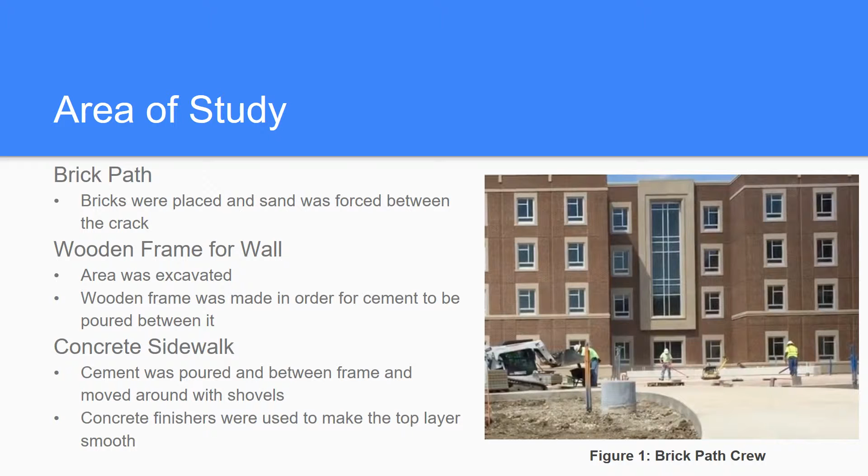This prevents the bricks from moving around in the future. The last activity we observed was the construction of a concrete sidewalk. Workers were moving around the cement with shovels to spread it out evenly, and also using a concrete finisher to make the top layer smooth.

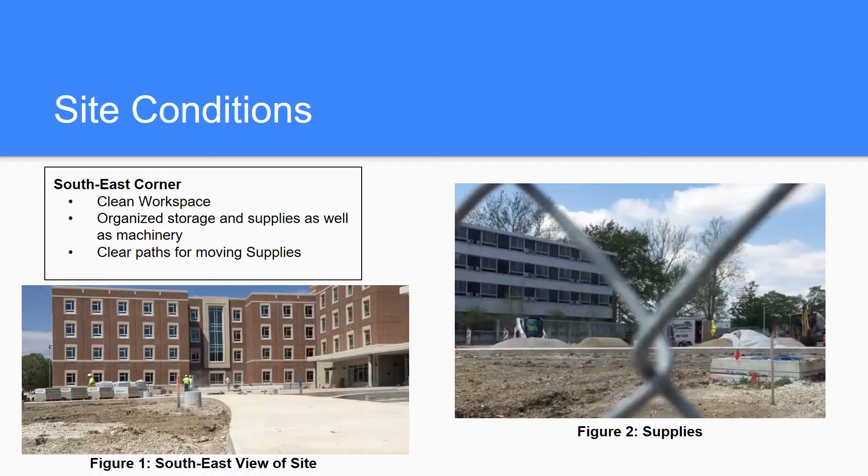The conditions for the residence hall construction site were overall tidy and well organized. In the southeast corner of the site, we saw a very clean, clear workspace, as seen in Figure 1, a screenshot from our video. The material and supplies were stockpiled in the corner in an organized fashion with a clear path to and from them, seen in Figure 2.

The site conditions in the northeast corner were also pretty organized and clean, as seen in Figure 1. The only thing we noticed were a few 2x4s out of place, which could cause a safety issue, and some garbage laying around. There is also a cleared path in and out for transfer of materials, machinery, and people. Last, the excavated area was safely braced, however it lacked clear markings to let other people identify it easily, which could be a safety concern. This is seen in Figure 2.

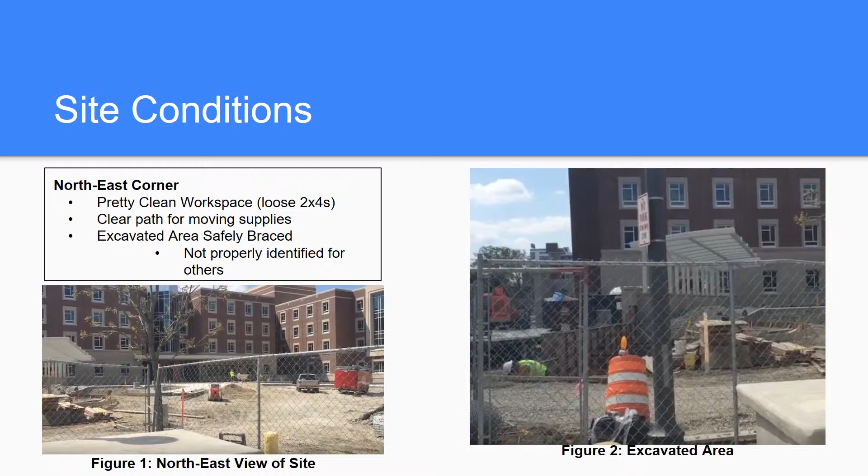Taking a look at the overall site, we can see how the original transportation and storage area was set up on the left, and how it currently is set up on the right. The reason for the change is that now there are concrete sidewalks and obstacles in the way of the old route, so a new route had to be made.

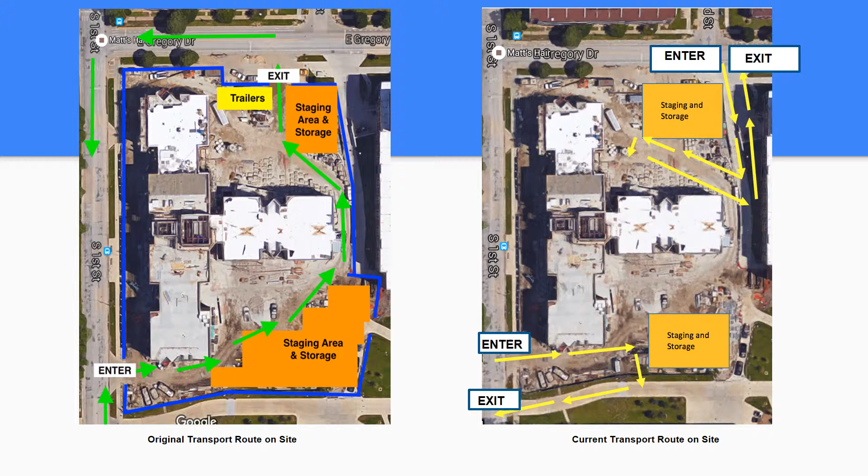The objective of a crew balance sheet is to measure the productivity of a crew during a certain time interval. This is done utilizing a bar chart and observing at what moments a given worker is working or idle. For our group, we did a crew balance for a crew of 5 workers laying sand in the cracks of a new brick pavement. The crew consisted of 1 bobcat operator, 1 wheelbarrow worker, 2 sweepers, and 1 leaf blower.

The most productive worker was the leaf blower, who was never idle for the full 5 minutes. That being said, he probably had the easiest job. The bobcat operator and wheelbarrow worker worked hand in hand; if one of the workers was delayed during their cycle, the other was forced to be idle. The crew balance chart is a very useful way to look back and see how productive each worker was at any given moment.

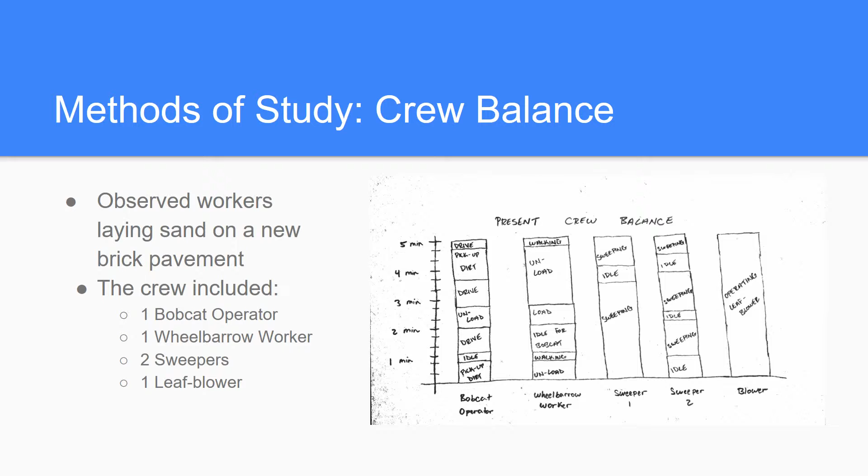A process chart is a sequenced list of action items which demonstrates the procedure of a particular work cycle. Each item has a symbol associated with it to characterize the nature of the action. There are 5 types of symbols.

A circle indicates an operation being done in a specific place. An arrow indicates the transportation of a material or piece of equipment. A square indicates checking or inspection. A half circle indicates a temporary delay or holdup. A triangle indicates the storage of a material or piece of equipment.

Next to each action item is a brief description of what transpires during that period. Process charts make it easy to understand all the actions that go into a process. Included is an example of a process chart which we drew that outlines the procedure for spreading sand across a brick surface.

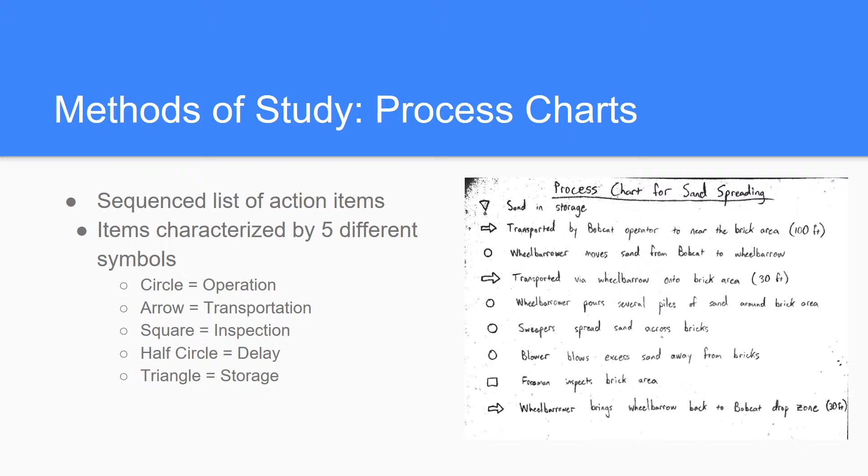A flow diagram, usually paired with a process chart, is a more visual representation of the sequence of action items in a particular work cycle. Flow diagrams are characterized by a series of action items represented by captions or labels that are clearly connected by a series of arrows which indicate the order. Accompanied with these captions and arrows are visual aids that illustrate the type of action being done.

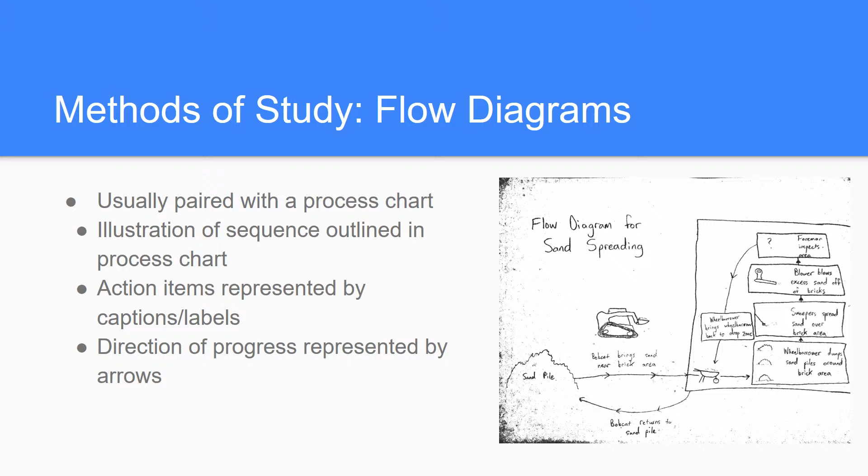The purpose of including a flow diagram with a process chart is to provide an illustration in order to help visualize the actions being done, as well as the space, equipment, materials, and labor necessary for the job. Included is an example of a flow diagram that we drew for the same sand spreading process.

For the analysis of existing operations and problems, we analyzed crews working on both the north and south sides of the site, beginning observations at roughly 11 a.m. On the north, they were placing cement in the curb line and finishing that cement. There was a carpenter stripping forms from a previous pour, and they were unloading supplies off a delivery truck.

On the south side, they were cutting and placing brick next to the curb line. They were compacting the placed brick and placing sand on top of it, transporting sand and gravel using a skid steer and a wheelbarrow. They were also placing and finishing cement.

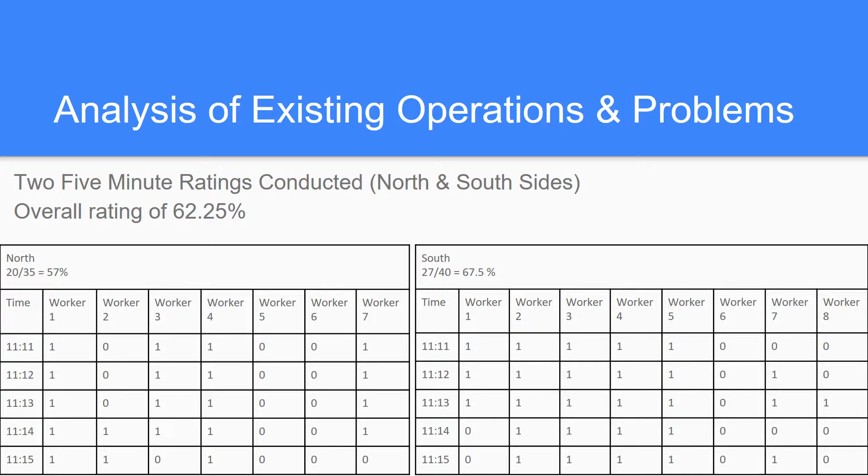We conducted two 5-minute ratings. On the north, observations gave us a rating of 57%. In the south, they gave us a rating of 67.5%. This gave the crews an overall rating of 62.25%, which is actually very good. This has to be taken with a grain of salt, however, because even though they were working, they may not have been working as productively as they could have been.

We noticed three main issues in our observations. There was poor placement of gravel and dirt for the south side operation. This led to long travel times, which made them use a skid steer and a wheelbarrow to bring materials for the brick operation. This then led to a significant amount of machine idle time, because they only used the machines for a fraction of the time when working on the bricks.

Third, the fence on the north side had too large of an entrance. This could lead to students and people wandering onto the site at night, or in general it's just unsafe. Also, the transportation of cement was using the public walkway, which was very unsafe.

Other small issues were workers seen smoking cigarettes while working on campus property, and another worker seen talking on the cell phone while working for an extended amount of time.

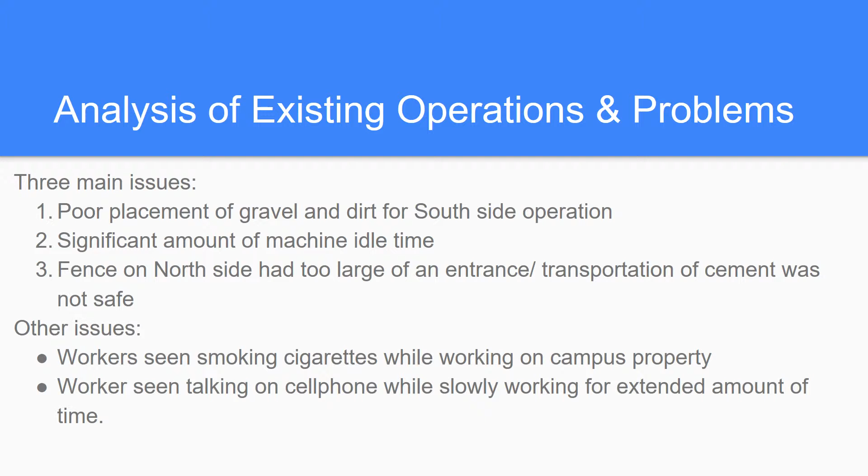The first of our proposed improvements was to change the material drop-off locations. The current locations of some materials were not economical for the processes in which they were being used. By moving the materials closer to where they were needed, travel time would be reduced and therefore productivity would increase.

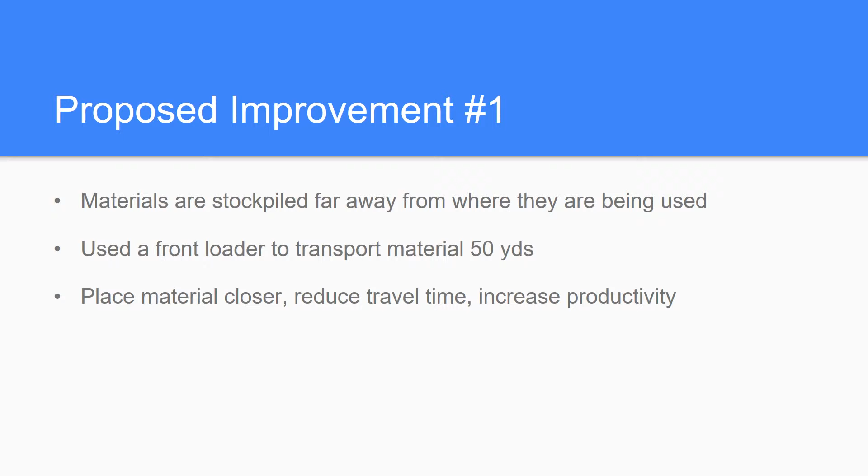On the southern side of the job site, there were dirt and gravel piles placed quite far away from the area in which they were being used. This led to mobilization using a front loader, as can be seen in this picture.

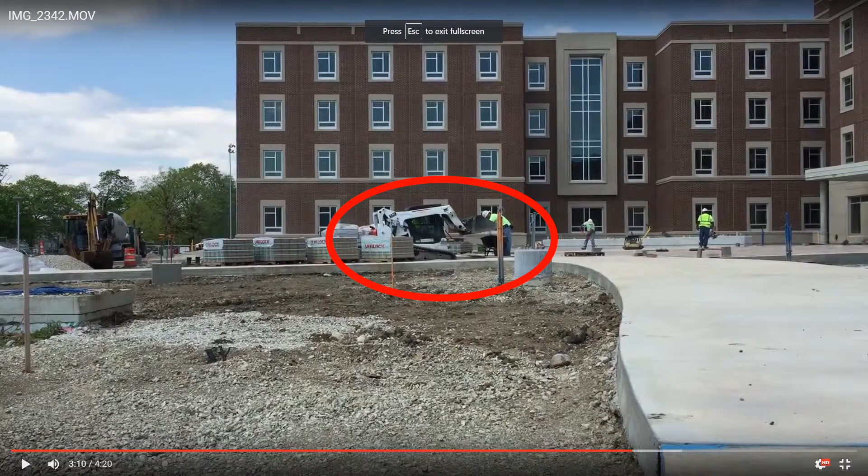After the dirt was mobilized, it was shoveled into a wheelbarrow. In addition to the wheelbarrow operator and the front loader operator, there were also 3 people constantly spreading the dirt being mobilized. We believe that the use of the front loader in this situation could be eliminated altogether.

By dropping off the dirt and gravel piles closer to the building, the material could be directly shoveled into the wheelbarrow. Not only do you get rid of the rental cost of the front loader, but you also acquire a crew member to assist with spreading the dirt. Though adding another spreader would not decrease the process time, it would definitely decrease the time of the project as a whole.

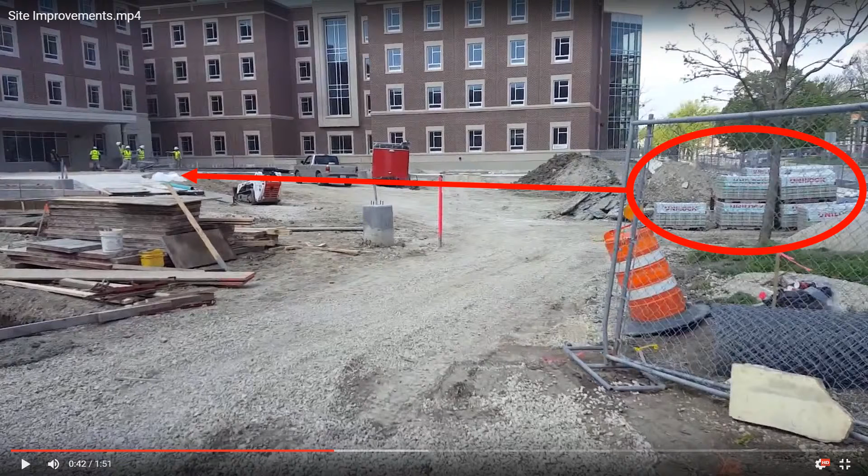A similar instance on the northern side of the job site was present with the bricks they were going to be laying. The bricks were located a good 50 yards from where they were going to need them. Again, we proposed dropping off the material closer to the place of use. An example of this could be seen on the southern side of the job site, where the bricks were located right next to where the workers were laying them.

Our second proposed improvement is to remove idle equipment from the job site. There are multiple pieces of equipment on site that are not being used. If the equipment is being rented, sitting idly on the job site is directly costing the company money that could be saved simply by ending the lease. If the equipment is needed for additional work in the short term, the schedule should be revised so that the work requiring the equipment is close together, minimizing the time the equipment is idle.

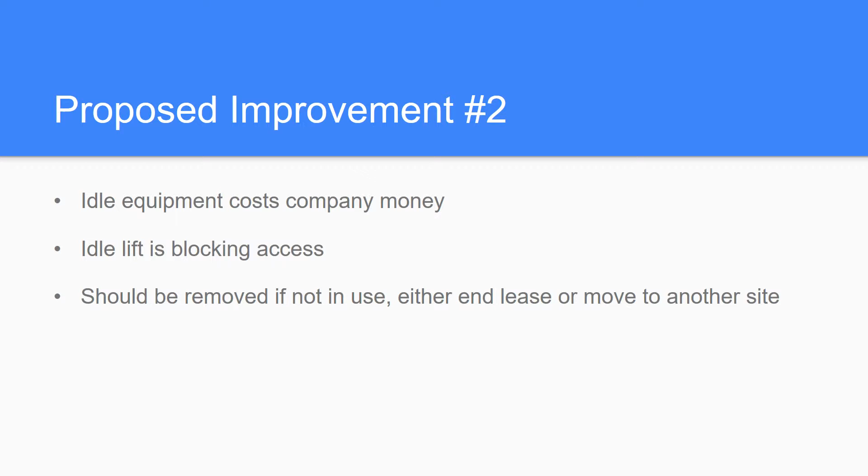The same philosophy should be followed if the equipment is owned by the company. While there isn't a direct renting cost to the equipment if it is owned, idle equipment is still costing the company money, as it could be undergoing maintenance or being used on another project.

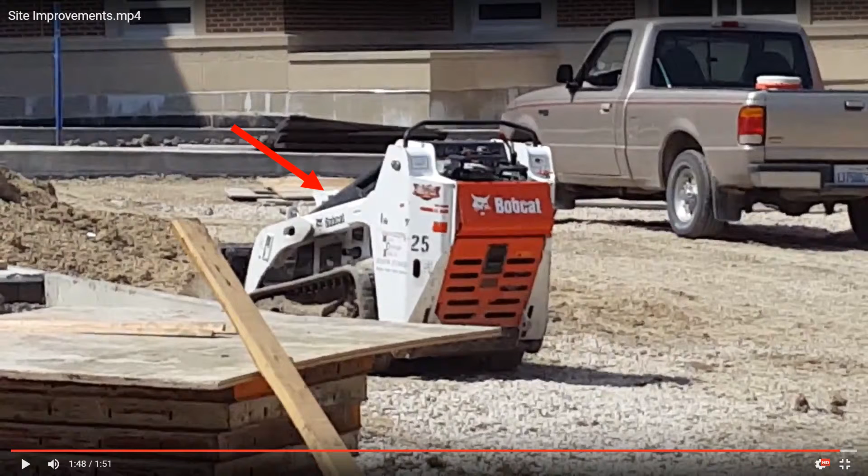The second piece of equipment was the mini loader shown here. This loader was completely idle during our observation period and simply sat in the middle of the construction site unused. There are a couple of minor jobs that the loader may have been useful for, for example helping move the dirt that the full-size loader was moving, as shown earlier in the presentation. But overall, it seemed best to simply remove it from the site, as it didn't seem to be serving any purpose at the moment.

While observing the job site, we noticed there was a very large gap in the fence on the northern end of the job site. This gap spanned roughly 30 yards, which is quite excessive. The gap greatly exposed the project to the public.

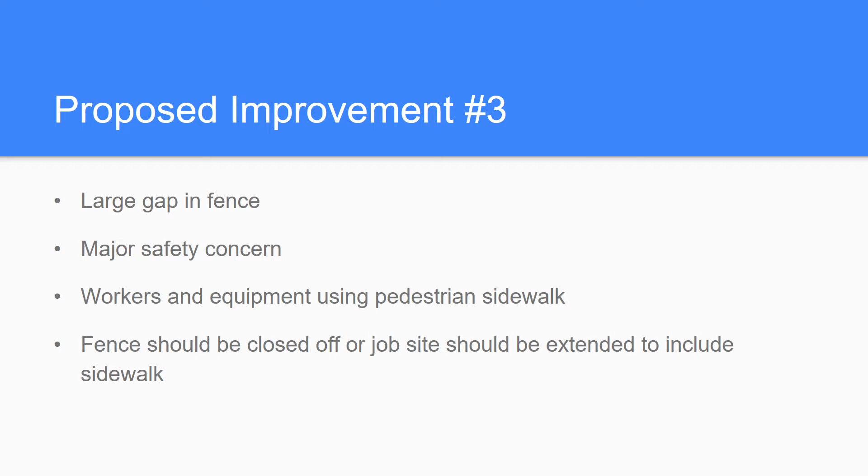We propose that the fence be closed off much more. Though this may decrease productivity in the slightest, safety should always be the main concern. We also propose that the contractor extend the job site and have the fence encompass the entire walkway. By doing this, you would increase productivity with more room to move around, and you would decrease the safety concerns for pedestrians walking by. Though students may have to walk a couple of extra minutes around the building, it is a small price to pay for their safety.

To implement this proposal, adjustments must be made in terms of where the dirt and gravel are being dumped and who is transporting these materials. This change must be communicated to all members of the crew, since it will change the number of workers involved in the process and the paths that they will be walking in.

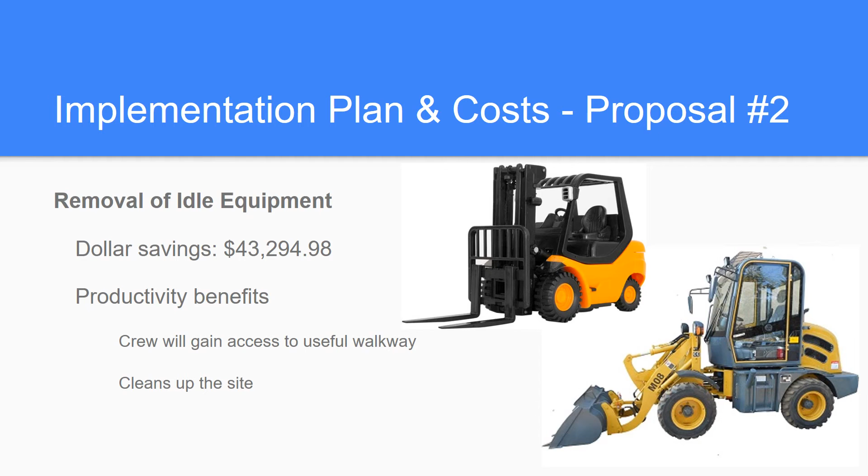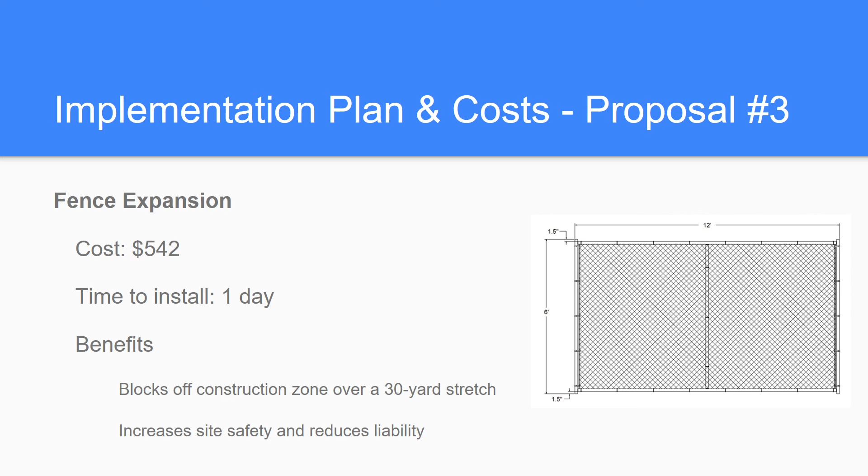To conclude, the Wasatch Hall construction site is a safe and efficient work site, but we see room for improvement in the mobilization, the idle equipment, and the fencing. Our proposed improvements could save Turner roughly $90,000. Thanks for watching.